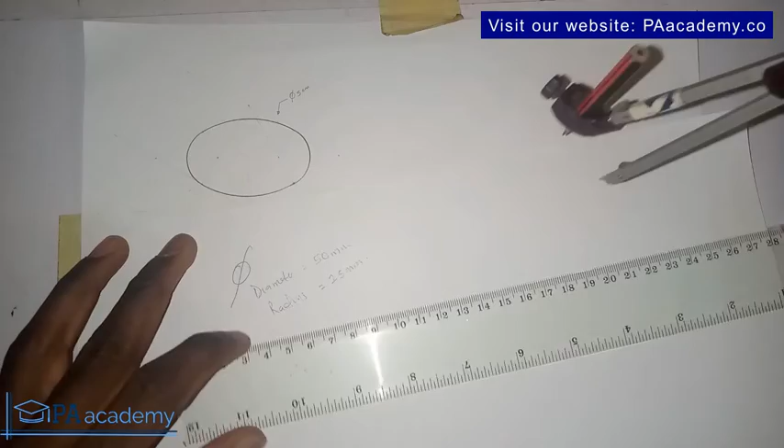So for example, let's look at this circle again. This circle, like I said, has a diameter of 50 and a radius of 25 millimeter. Now if you are to draw it as a normal circle, I'm with my compass now, and we measure our radius to be 2.5 centimeter, that's 25 millimeter. So if you are to draw the circle normally, you are going to have something like this. So this is the normal way of drawing a circle.

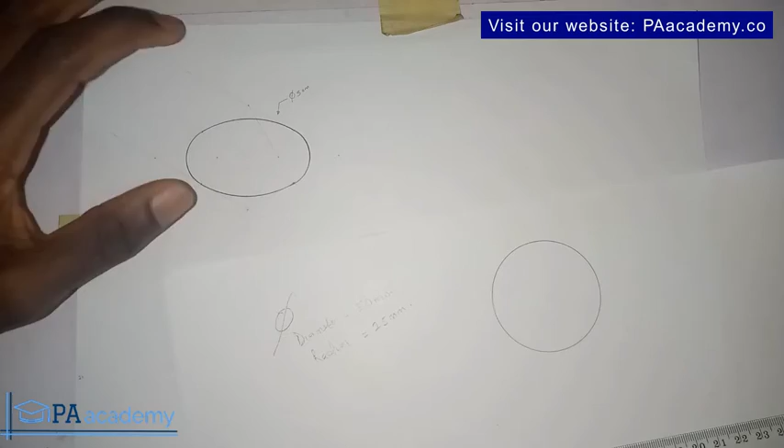This is the normal circle, and it is the same circle we are having here. The difference is that this is just the regular circle, while this is in isometric projection. So how do we convert this circle to this? That's what we want to do. So to start with, if you have been following these videos, remember that the first thing I draw is my horizontal line. So I already have my t-square.

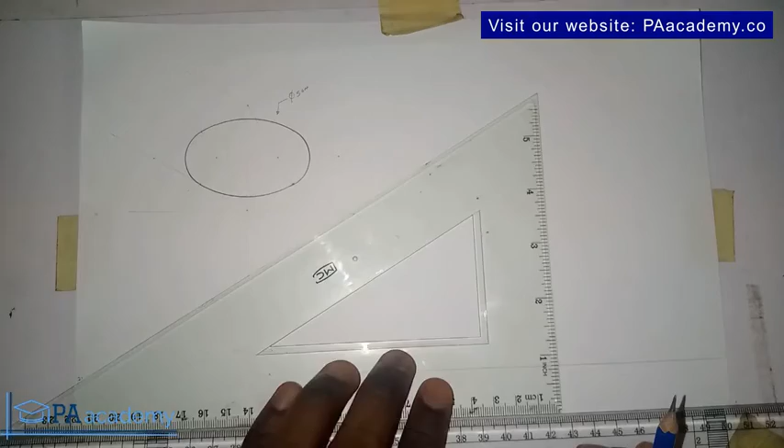The tools you are going to need: your t-square, your set square, and for the first time, if you have been following, I'll be using the compass. So I'll be putting you through how to use all of these to get your isometric circle. So let me draw my horizontal line, and then I bring in my set square. Like I always say, make sure your set square is sitting properly on your t-square. And then you draw your vertical line.

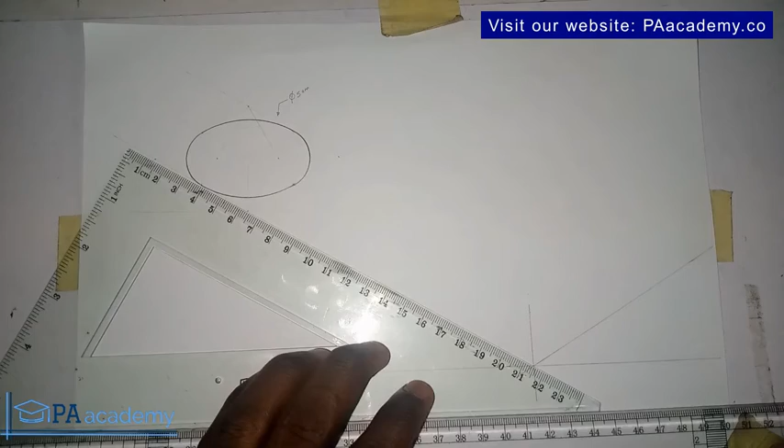So you note the point of intersection. So this is the point of intersection. And then you draw your 30 degrees line. For this, you won't be needing a protractor at all. And then on the other side, so we already have this.

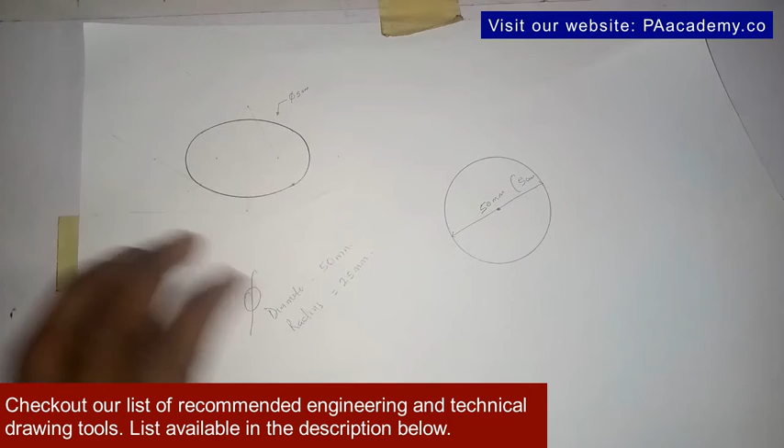Now the next thing is this: since we are drawing a circle with a diameter of 50 millimeter, that means the distance from here to here, like this is the center of the circle, from here to here is 50 millimeter. So that's 5 centimeter. Alright, so on this line, we are going to measure that 50 millimeter.

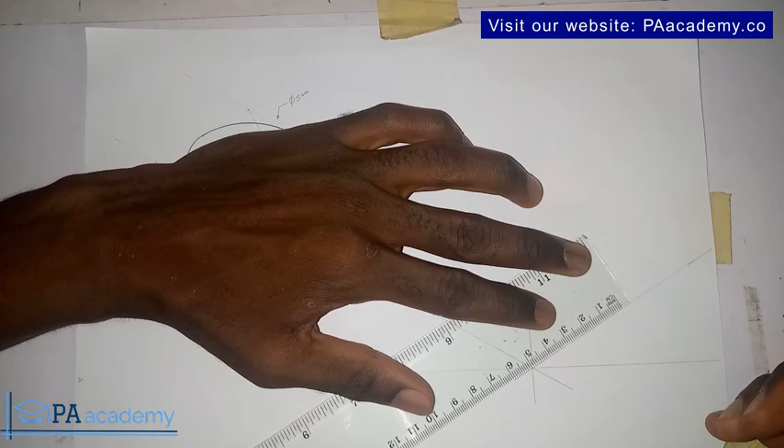So I'm going to take the measurement for 50 millimeter. So this is it here. And on the other side, I'm still going to measure 50 millimeter, which is the same as 5 centimeter. So I've noted those points. So I'll bring back my set square and my t-square.

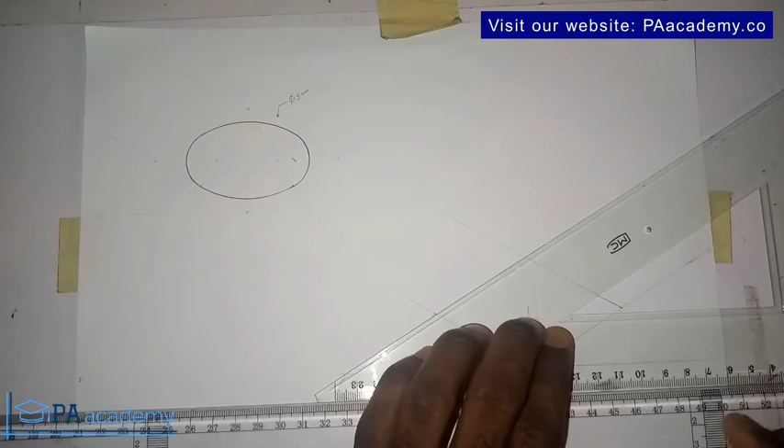So this is one line, turning the other way. So this is the point of intersection. So what it basically means is that our circle will be within this box that I'm having here. So the next thing we are going to do is divide it, find the middle of this line and this line, and then we are going to divide it like this and like this.

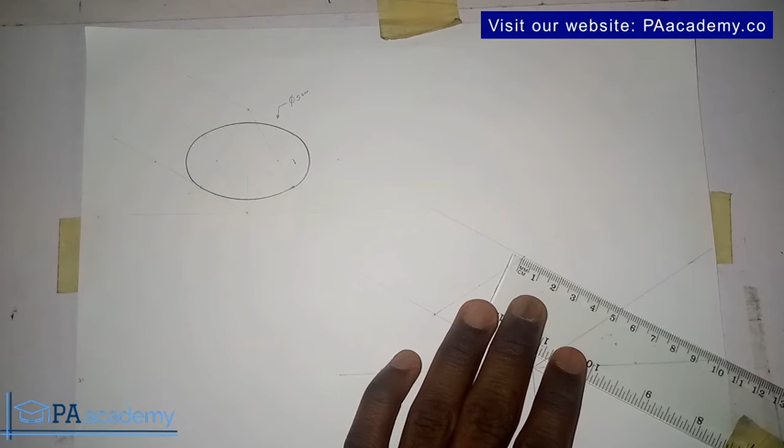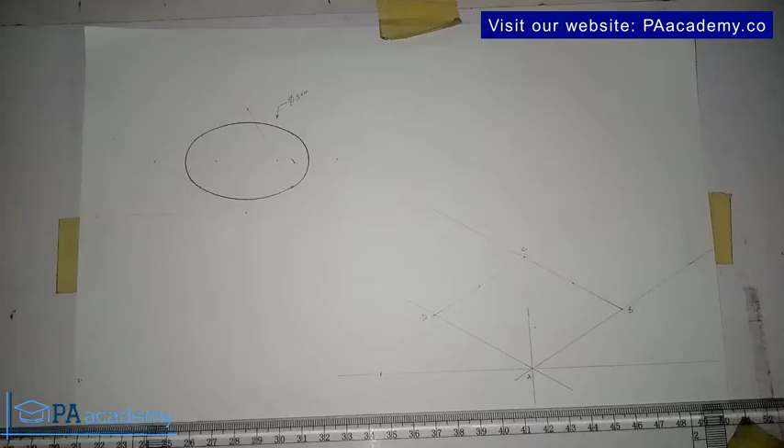So let me just divide this. Let's see, so that'll be 25. That's 2.5. And then, just to make it easy, let me call these points A, B, C, and D. So what we've just done is divide line BC and then line CD. We can use it to divide what we are having. So it's a faint line like this.

And like this. So you can see how I've been able to divide it. Now the next thing we are going to do is this. Now pay attention to this. If you look at these four sides, let's call this angle A, angle B, angle C, and angle D. You will notice that angle B and angle D are less than 90. I come again: the angle here and the angle here are less than 90.

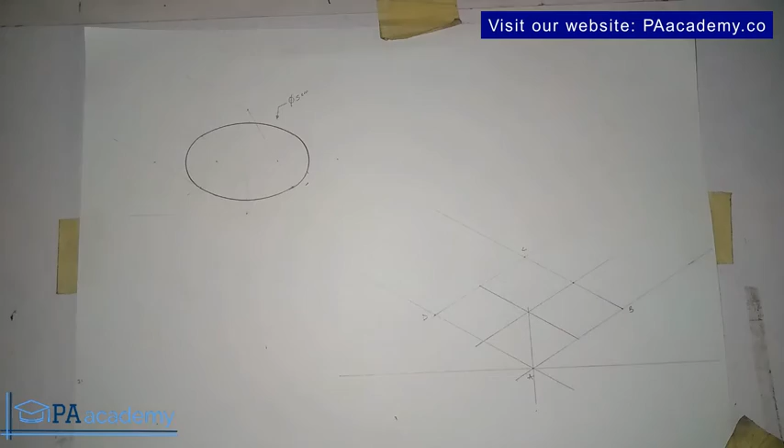But A and C, if you look at them, you can see that they are more than 90. Being more than that, it forms an obtuse angle. That's an angle that is more than 90 degrees. So now from those points, let's start from A. We are going to draw a line from this point A to here.

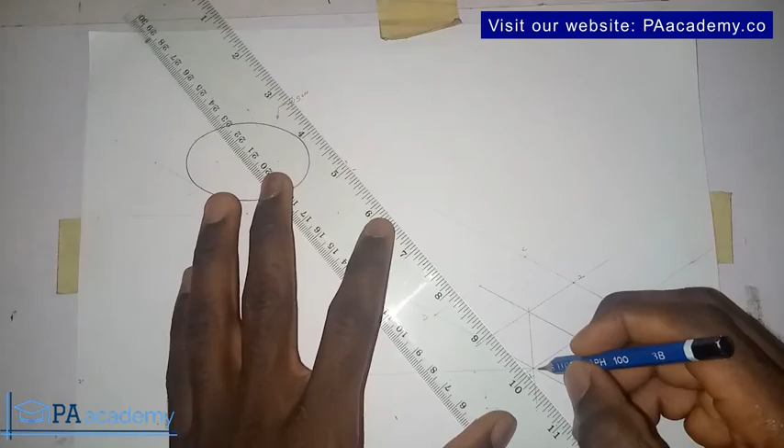So let me call this point 1 and then point 2. So we are going to draw a line from A to point 1. From A to point 1. All these are faint lines. I'm only making it visible so that you can see them. If I make it very faint, it won't be clear in the camera. So you'll be having something like this.

So I've drawn a line from point A to point 2. So from point A, I draw a line to this point 2, and from A also I draw a line to point 1. Now what we've done to point A, we are going to repeat starting from point C. So this time from point C, we are going to draw a line. So let me call this point 3 and then point 4.

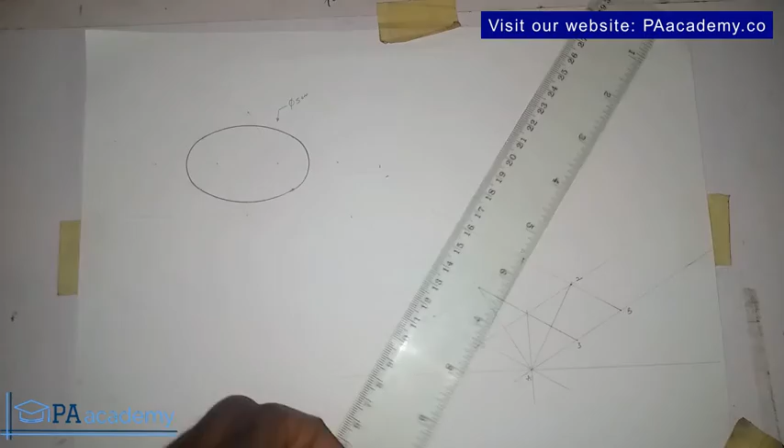Remember, this point is where we divided those lines. So from point C now, I'll draw a line to point 4. Just make sure you pay attention to point 4. And then from point C, I'll draw a line to point 3. Now, if you look very closely at this point of intersection right here, and the one right here, let me call this one X, and let me call this Y.

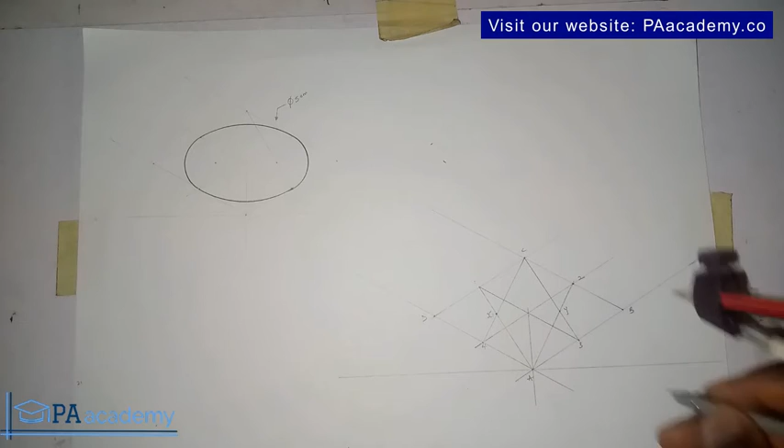I'm still going to give you another important hint once we finish drawing the isometric circle, so make sure you keep watching to the end. So now you place your compass on point A, and adjust it to point 1, and from there you draw it to point 2. It's definitely going to get to point 2.

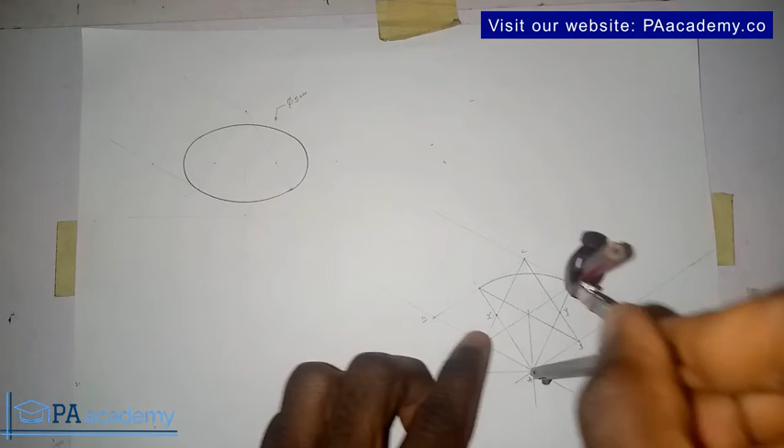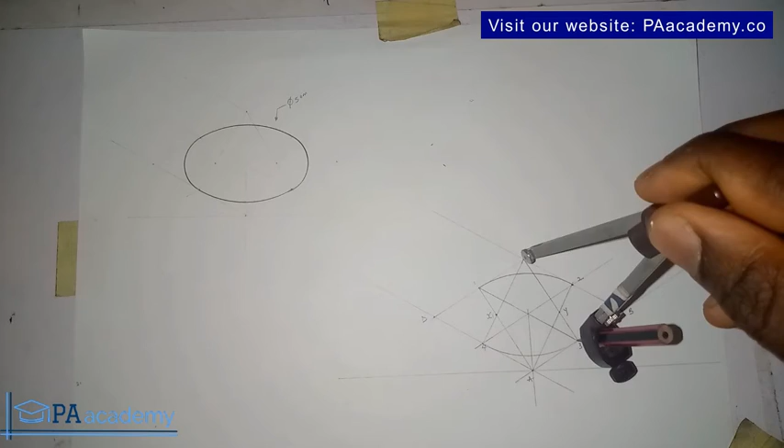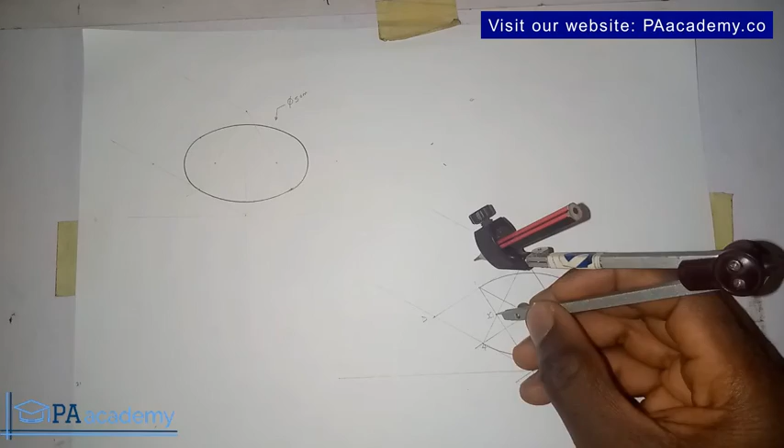So you can see that is forming one side of the circle we are drawing. So you go to point C now, and join point 3 and point 4. Point 3 and point 4. So now we go to point X. You place your compass on point X and adjust it to the same length to point 1. So from X to point 1, and it will be the same to point 4.

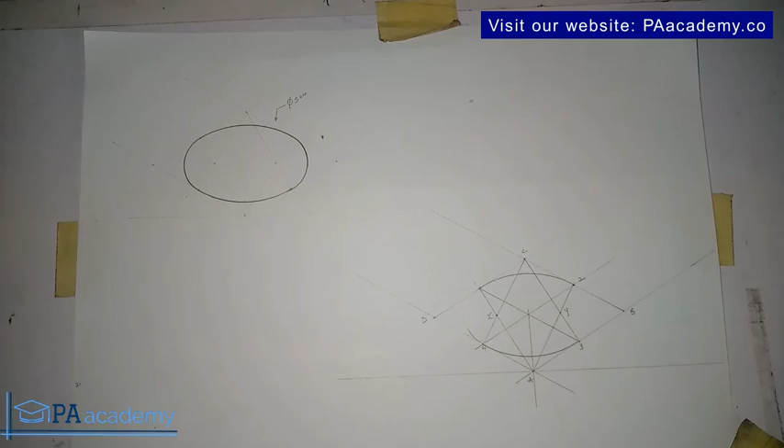So you can see you have to be very careful when you are doing this. I need to clean this off so that I can do it again. Alright, let's do this again. So from point X, we draw it from point 4 to point 1.

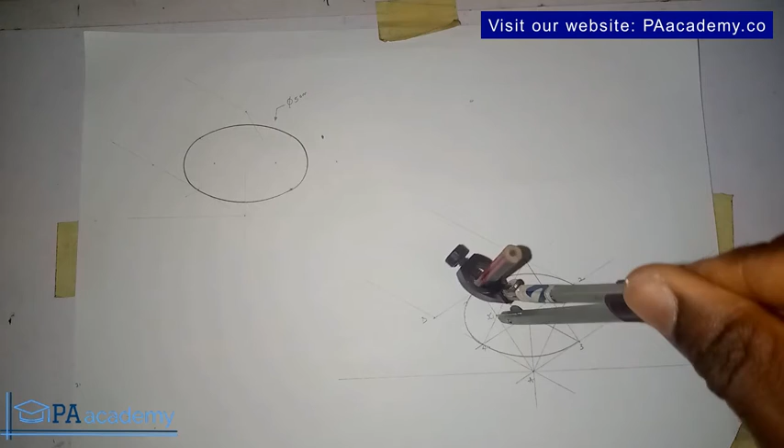So with the same thing from point Y, we are going to draw an arc from point 2 to point 3. We are going to connect those points. So on point Y, just make sure that your compass is properly gripped to your paper so that it won't slip like we did earlier.

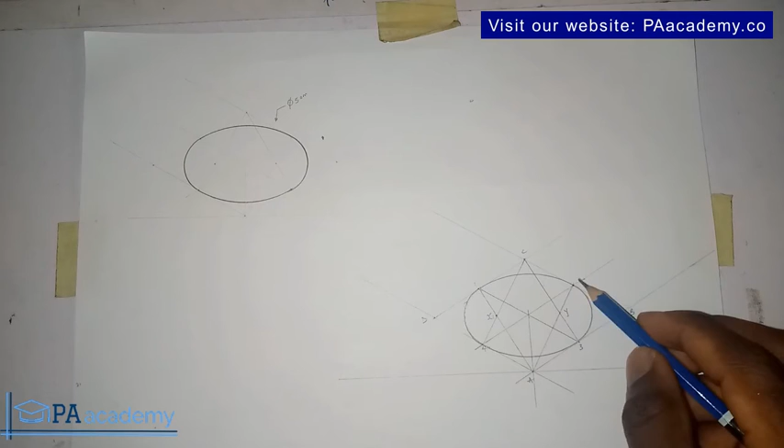So you can see with this now we already have our circle. This is the circle like this, the one that is coming from 1 to 2 to 3 straight to 4, and that's our circle. Important thing to note, when you are doing yours, make sure all these lines are faint lines. Make sure they are very faint.

I'm sure you can see it here because I just want you to see it so that you can note the points. If you look at what I'm having here, it's not very visible. You can barely see it, but the points are there. So that's what you should always note when you are drawing yours. And the important thing I also want you to note, like I said, is where you pick when you want to draw it. Let me do a rough sketch for you so that you can get what I'm saying.

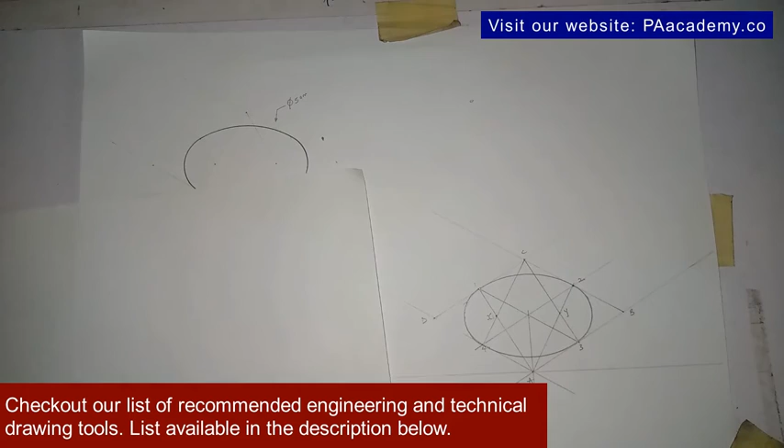Now if you look at this particular example I did, we drew our 30 degrees and our 30 degrees, and then we had something like this. So once you have divided it, you have noted the middle of the lines. So you pick it. This is our A. You just have something like this, another one like this, and this is our C, and then you have another one like this. And this is our Y, and this is our X.

Remember, this is from here. You place your compass from here. You use it to join it to this point, and then from here you are going to join these points, and then place your compass here. Use it to join it like this. Place your compass here. You draw it like this. I hope you get that.

But now, like I said, the main thing I want to bring out is this one that is looking like V and the inverted V that we are having from this point. Let me just do it again. Now the V, we started from here, and remember I said it will be from the side that is the obtuse angle. That is the angle that is more than 90. That is where you take your V and your inverted V.

Don't make the mistake of drawing your horizontal line, doing your 30-degree lines, having something like this, and then picking your V like this. It is wrong. I hope what I'm saying is clear. It is very wrong like this. You pick your V from the angle that you know is more than 90, and they're always at opposite sides. So that is where you pick your V from.

So in the next video, what I'm going to be showing you is how to draw a cylinder in isometric drawing, using isometric projection to draw a cylinder. So let me show you what it's going to look like. I hope you can see that. If you cannot see it, you'll see it in the next part of this video, which will be coming up immediately after this video.